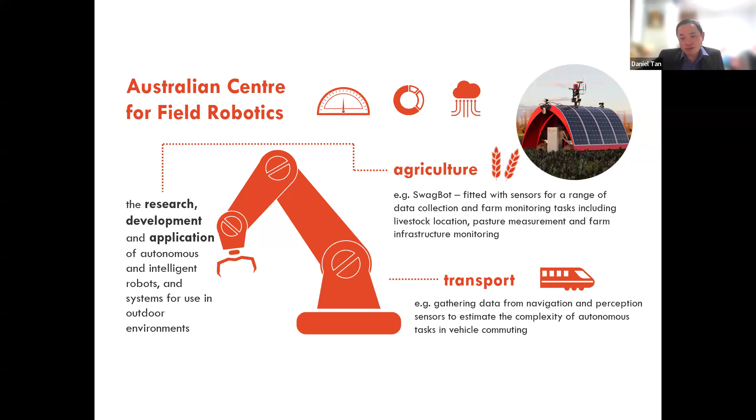So I'll just quickly go through, this is what the research at Sydney University is doing at the moment. A lot of it is still early stages, not commercialized yet.

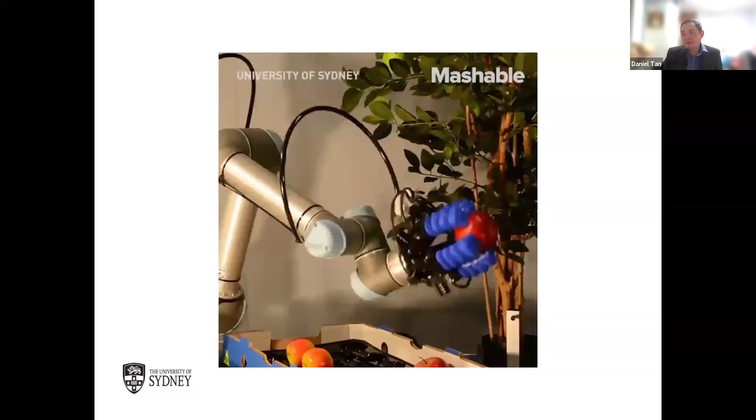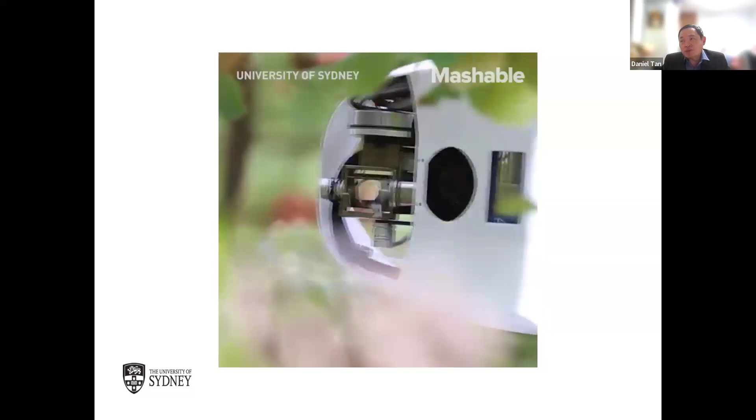So you can see what we're doing experimentally, but the problem is that our farmers are a bit larger than the ones in Cambodia or Myanmar, where farmers have quite small areas. Our farmers have large areas, so they don't want us to develop robots slowly. They want it commercialized, ready to buy and use. They also want, like the tractors we have in Cambodia, four-wheel or two-wheel tractors, to get servicing and spare parts. That's one of the problems: if you buy a robot, it's very nice, but what happens if it breaks down? Who is going to fix it? And what about the data they collect, like all this precision agriculture data? Who owns the data? There's a lot of questions being asked now.

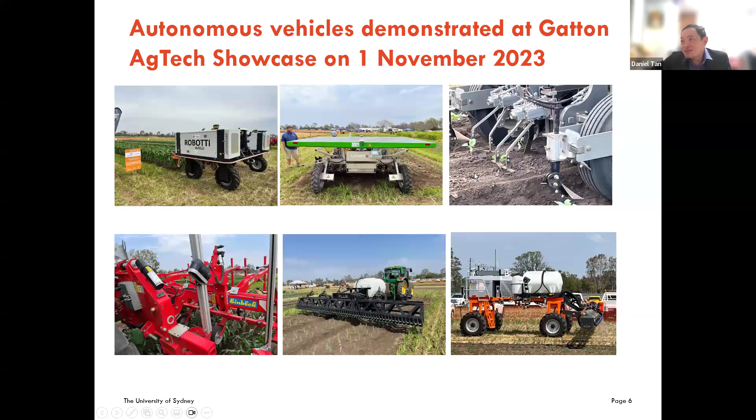So you can see this is the first one. I'll show you some of the machines that they demonstrated. Some work, some don't work so well. Like this one I point to, the second one I saw last year wasn't there anymore, so the farmers didn't like it and didn't buy any. So some machines are more popular than others. I'll show you one by one.

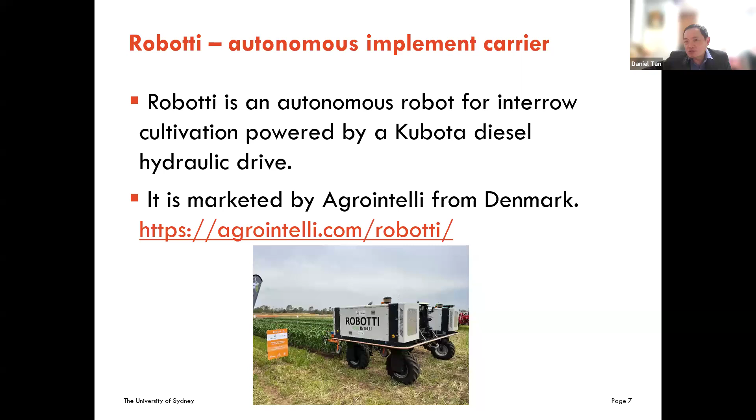This is the first one that was brought in from Denmark. You can see it's called Robotti, a funny name. It's popular because it uses a Kubota engine, a diesel engine, so it's easy to fix because we can just buy a Kubota engine and replace it, easy to get spare parts. It's from Denmark, so that's the disadvantage, we don't always get spare parts, but because it's Kubota, we can get spare parts. You can see it's a very simple machine.

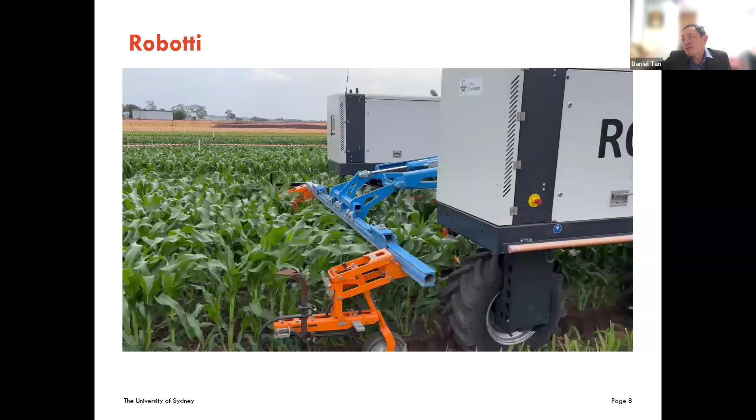It uses RTK, which you don't have in Myanmar yet I think. RTK is real-time kinematics, which means it can drive by itself, accurate within 1 centimeter precision. A lot of our tractors have that anyway, so this isn't really that new. It's just for weed control and cultivation, very simple, and it can turn by itself as well. No driver, runs by itself, and turns by itself.

You can see all our farmers down there taking photos because this is a new machine, it just came into Australia 2 or 3 years ago.

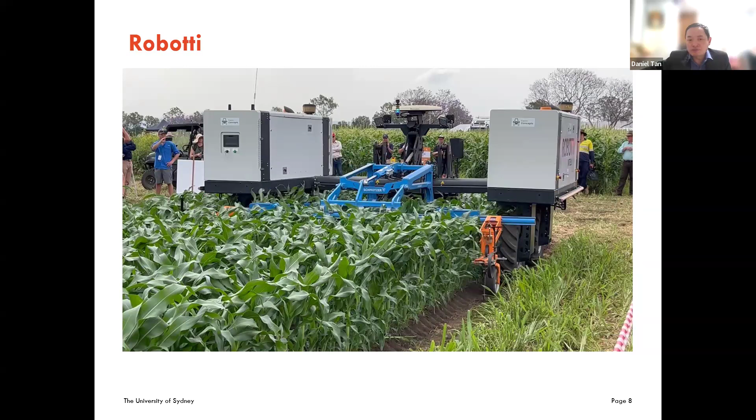Okay, there's another one called the Farm Droid. It's a lot slower because it's battery powered. It's got solar power as well, so you don't need diesel. It's becoming more popular because diesel is expensive, maybe in Myanmar too. So battery might be better, maybe not, because it's slow.

But anyway, some companies in Australia like Qualpak and KalFresh have bought this, and it's a bit slow sometimes when you have lots of weeds. When you have little weeds, it's okay. I'll show you the thing. It's a bit noisy as well, so you can see.

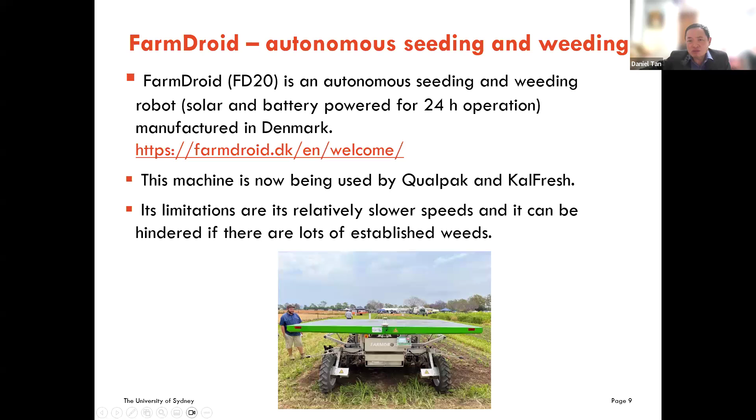So another cultivator, it's got a camera as well, so you can see it goes in between the crops. And you can plant as well. That's planting as well. Planting and weeding.

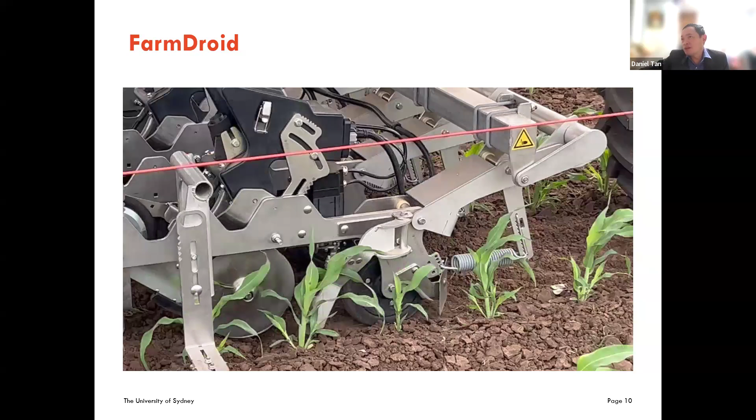No driver. You can see it can turn by itself. No driver, so that's the advantage I guess. But very slow, you can see, very slow. A lot of farmers said, oh too slow, I have a big farm, this will never cover my whole farm. So that's a bit of a problem too.

But it's very popular in Europe, right? A lot of countries in Europe have this little robot now.

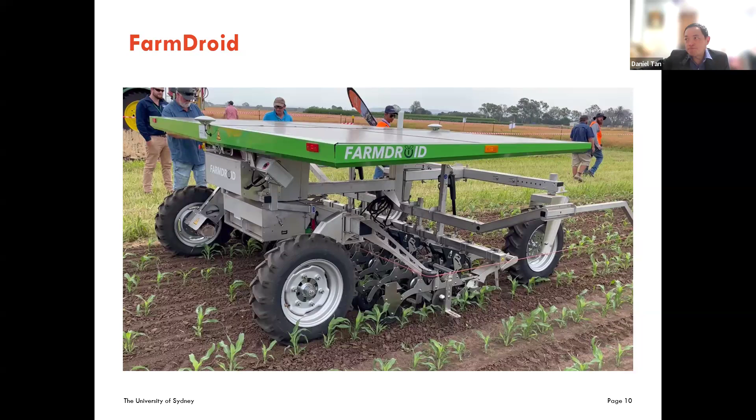Okay, this is another one, it's called Stout. It's built by a farmer in Salinas Valley in California. Case New Holland, which is also a company in Australia, has bought a share and they supply spare parts. It's not totally a robot, you have to drive it. You have to drive a tractor, and it's driven by the PTO of the tractor.

KalFresh has one, I think it's not very popular this year. Last year I didn't see any more. They bought one, and then I think they didn't like it. And other farmers didn't like it either. I'll show you why, you can see.

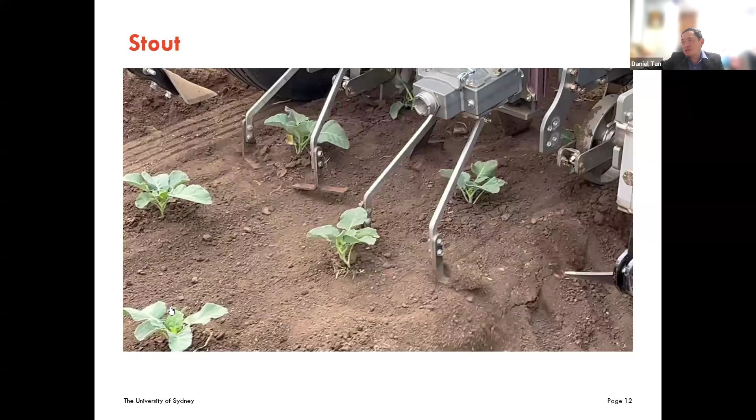So you can see it's not very well calibrated. Sometimes it almost killed this cabbage or broccoli here. Yeah, so I think it was designed by farmers in California, so it's for sandy soil, not so useful for our black soils that we have.

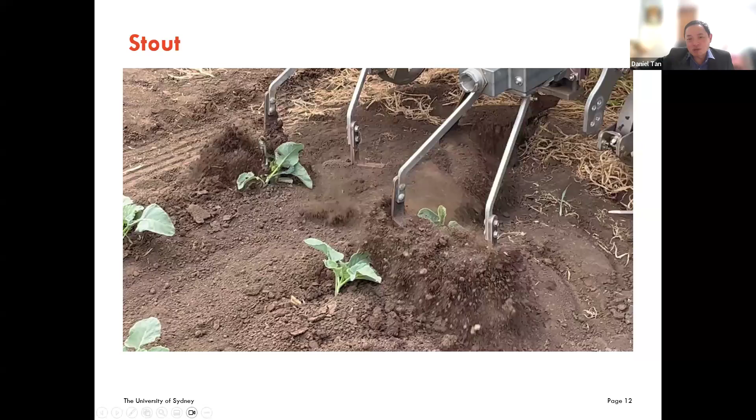In Gatton or in Queensland, I think Professor Miltry knows this place in Gatton. So yeah, it's also killing this one. So not very good, and maybe I shouldn't say this on record, but a lot of farmers didn't really like this machine so much. Okay, I'll show you another one.

This is one from Austria. It's just basically a camera, you can see a camera here, and it helps it go on the right rows, that's all. So you need to drive a tractor, you can see it's not automatic. So this is from Austria.

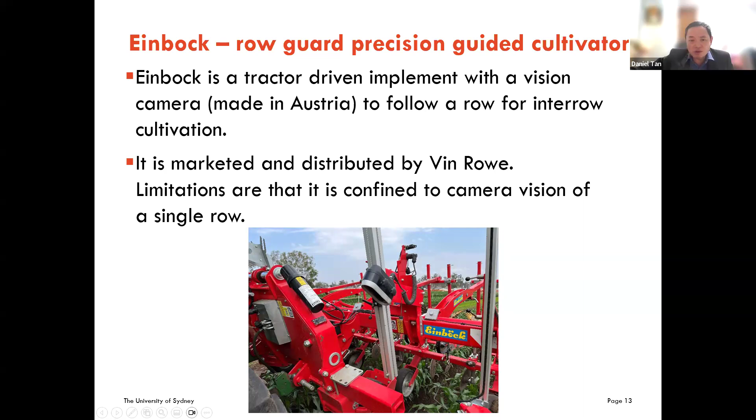You need to drive through, so it's not automatic. But the tractor, all our tractors here have this, right? Like you can see this thing here, this is the RTK, real-time kinematics.

Basically, even if it doesn't drive, this one can drive by itself using this RTK. So if you're not familiar with RTK, what happens is RTK uses the GPS that we use in our cars, but it's more accurate because the farmers have a base station to increase the accuracy of the driving of the tractor.

So this guy doesn't even need to drive. He can use the RTK in the machine, in the tractor itself. I'll show you another one.

Toowoomba is about 40 kilometers west of Gatton, which is about maybe 40, 80, 120 kilometers west of Brisbane. So anyway, with being moved to a bigger town, it's got more labor supply now, so they can build more. It's still quite expensive.

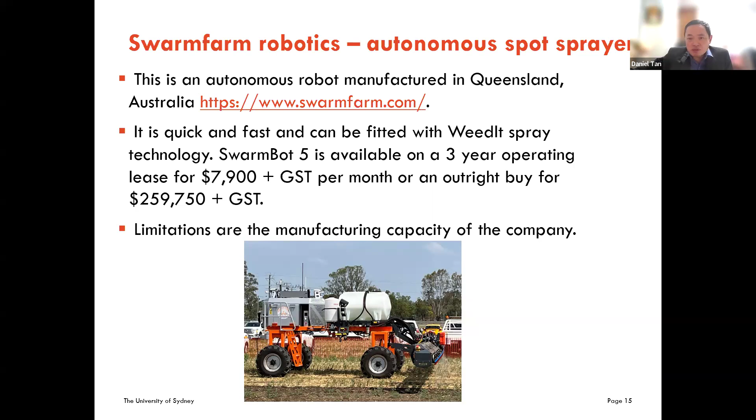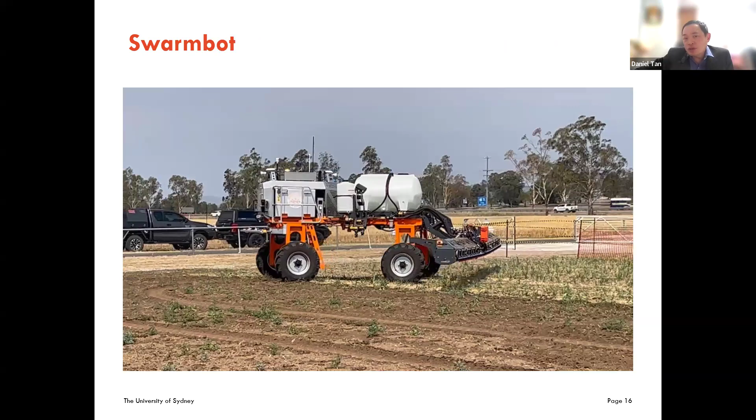I'll show you, these are all my own videos so it's not very good, I was using my own iPhone to video all this. So you can see it can turn by itself. It's got RTK on top, it can drive by itself, and it sprays by itself as well.

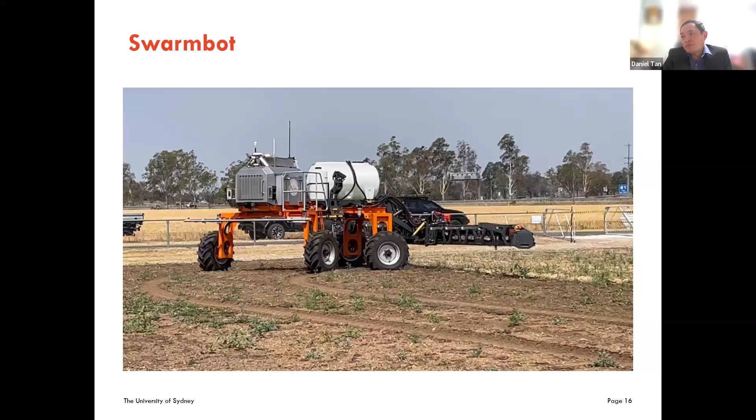No driver, as you can see. It's driven by diesel, it's a diesel engine.

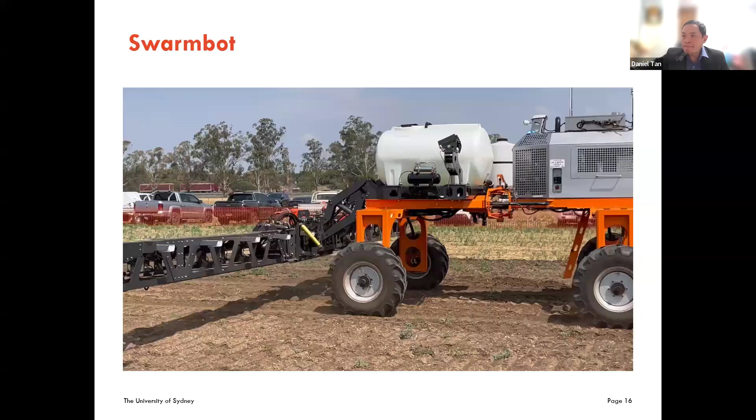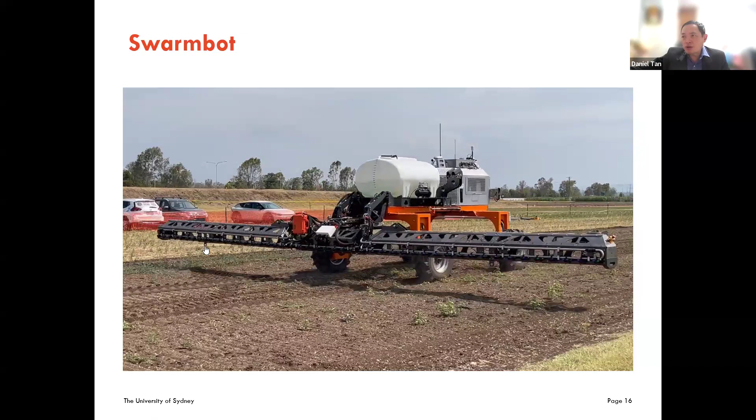So it's mainly used for spraying. You can see what it does. There are two types of spraying, right?

There's the old spraying method, which they call green on brown. This is green on brown, where brown means it's on fallow, like our rice fallows in Myanmar or Cambodia. We have a lot of rice, and then a short or long fallow between rice or mung bean or something else.

Or galapi, the chickpea. We have rotations, and between the rotations they maintain and kill the weeds. So you don't spray the whole field. If you spray everything, you use a lot of herbicide, but this uses a sensor, so it only sprays where the weeds are, not the whole field.

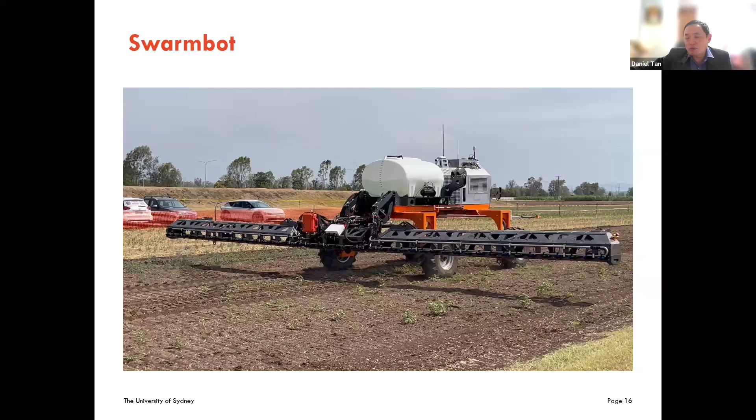Okay, I'll show you the technology now. This was actually developed in Australia. It used to be called a WeedSeeker. Now Americans have also used this and developed it further into the WeedIt technology, green on brown. So I'll show you green on brown technology. It's very simple technology, nothing high tech about it.

And let's see whether I can play it.

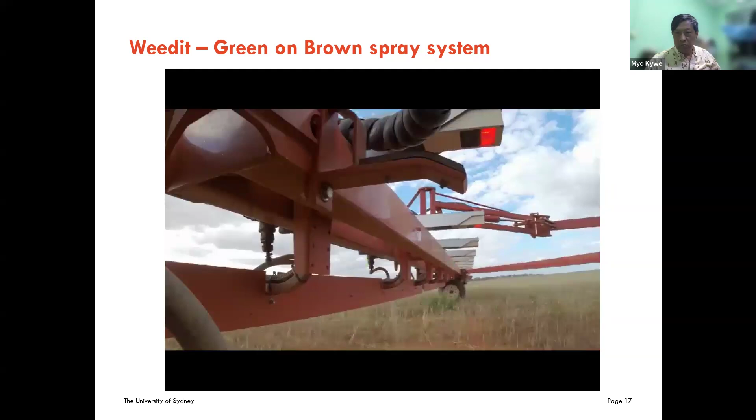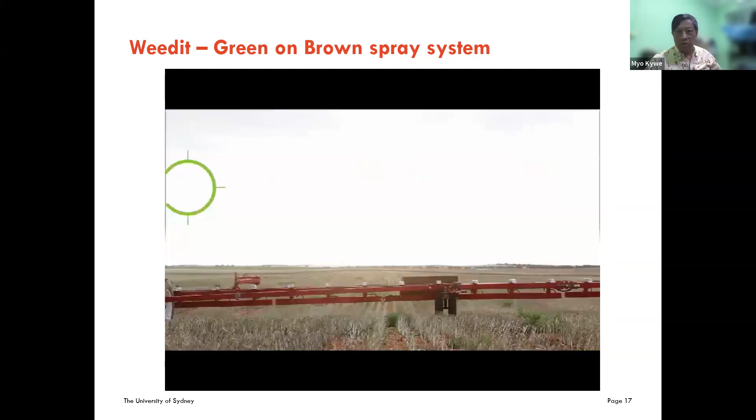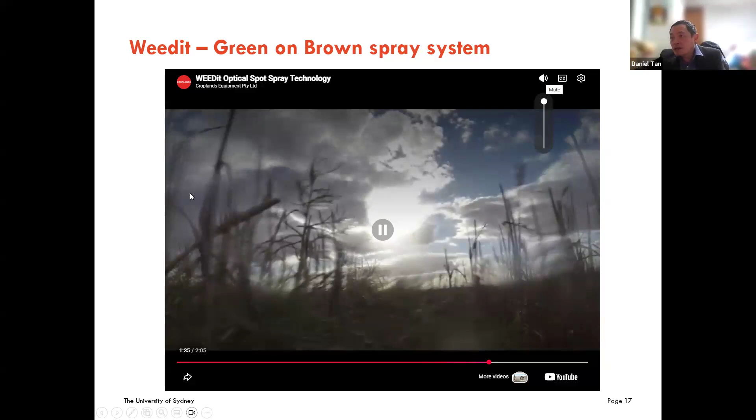There is no voice, no sound, Daniel, is it right? Without the sound. We didn't hear the sound, is it right? Without sound, Daniel. Don't hear the sound. So it's fine. Okay, let me stop this. You can't hear the sound at all? No sound? Never mind, I just explained to you how it works, right? But you understand the technology? Okay, I'll stop it. So what happens is it's got this - I think the most expensive part of the technology is the... Can you hear me? Yes, yes, yes. We hear your voice now.

The most expensive part of the technology is the sensors. What the sensor does is very simple - it just detects where the weeds are. Anything green, it will spray, so it just sprays the weeds in a fallow. Nothing high tech, no AI, nothing. Just simple: anything green, it sprays. So that's green on brown technology.

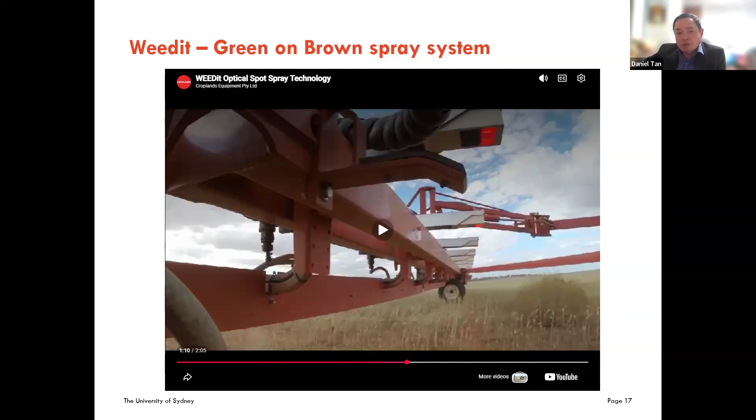Okay, I'll skip this one because it's not working well. But this is very popular now in Australia, America and Europe as well, because it's very simple, no need for AI, no need for anything. It's used for controlling weeds and it's very simple technology, so very popular. I think maybe 70-80% of farmers are adopting it because they can actually reduce their use of chemicals a lot. That's why it's so popular. I'll skip this one since you can't hear it.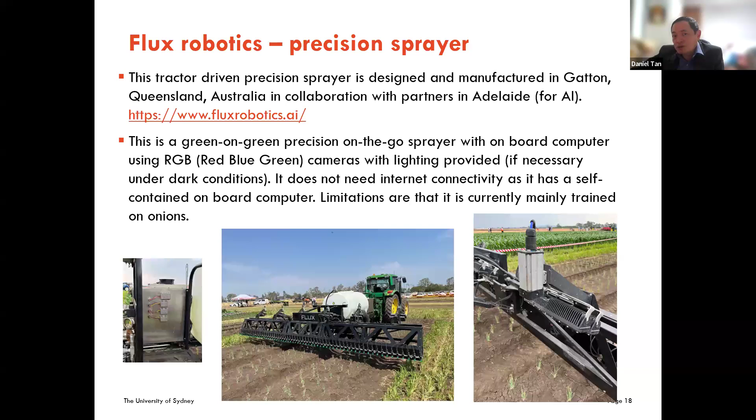But this is the old version with someone driving it. I'll show you a newer version later - they've been developing so fast, they have a new version. I'll talk about the Flux later, but they have a new version of it.

Okay, so that was 3 years ago, and last year they brought in more machines. Even the old developers in Australia have upgraded their old machines to new ones as well. So I'll show you the latest ones from the October showcase, just last year.

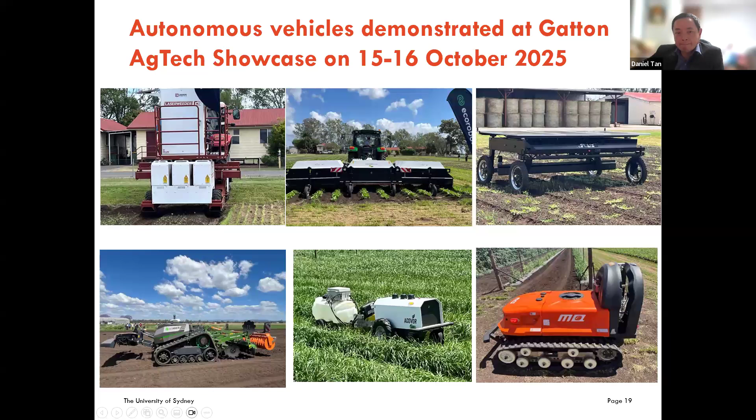Okay, this one is a funny one - it's a laser weeder. It's very expensive, and I thought farmers wouldn't buy it, but it was very funny. There's a story behind this.

I'm part of Hort Innovation, the group that funds all these machines coming into the country and tries them out. I'm on their strategic investment advisory panel, the board that decides which machines we invest in. This one was interesting because we wanted to borrow one and put it on a ship to go to Australia. It was funny because one farmer flew to America not knowing we had one coming by ship, so he ordered one himself. He went to see it in America, got interested, and ordered one.

And then they gave him the one that was on the ship on the way to Australia. So that's the story behind it.

But anyway, this is a funny one. It's expensive, but I know the Chinese are also building a similar one, and maybe they're selling it for half the price or even cheaper. So maybe in future we can buy the Chinese one, cheaper.

It's also green on green technology, meaning it can use AI to identify which is a weed and which is a crop, and it uses a laser to kill the weeds. The lasers are also second generation now - the first generation could only last 1500 hours, but the new diode lasers can last 15,000 hours, so much longer duration.

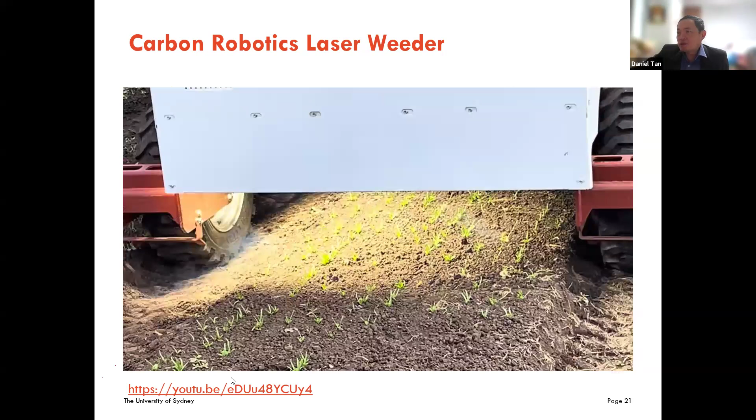So you can see, maybe not so simple, but it's like Star Wars - have you watched Star Wars, the movie or the whole series? What it does is it has a camera and can identify which is the crop and which is the weed, and it only kills the weeds, not the crop. We are testing now to see how accurate it is, but that's the gist of that technology.

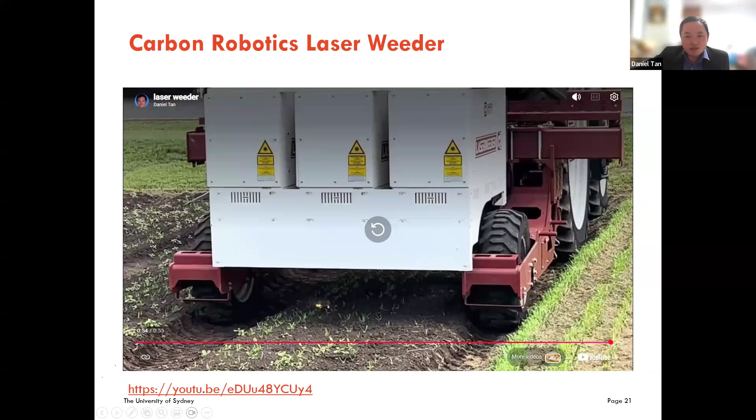There's a few others - the Swiss or the Europeans have one called Ecorobotix. So we brought one in to test it out. It's quite expensive too, 500,000 as well, and they have distributors now in Queensland and New South Wales. I'll show you how it works.

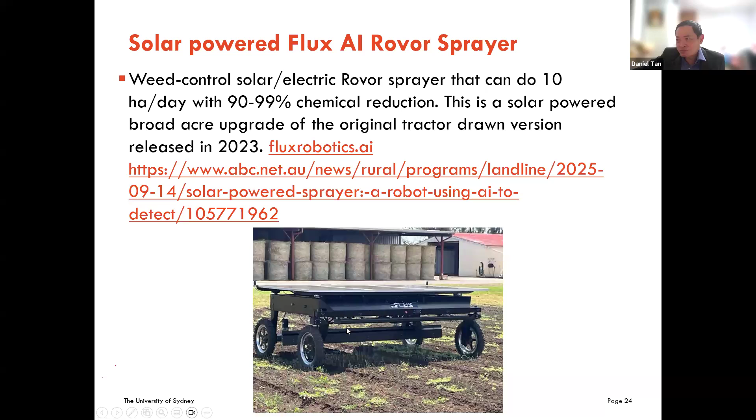So this becomes like a robot - you don't have to drive a tractor. It's the same company, but they've developed green on green technology, so this is a second generation - no more tractor drawn, it's all like a little robot. It's very similar to the early Danish ones that were brought into Australia. I don't know whether they copied them or something, but it's very similar to me anyway.

So this is the Flux Rover, which is Australian. You can see it doesn't spray everything - it sprays only the weeds within the crops, using AI to identify which are the weeds and which are the crops.

What happens is you can't spray something like glyphosate or paraquat because you'll kill everything since it's so close. Instead, it sprays a selective herbicide, for example 2,4-D or something similar, that doesn't kill the onions but will kill the broadleaf and other weeds. It's selective, and since it doesn't spray the whole field, you don't waste the chemical - you only focus on the weeds.

I'll show you - you can see it doesn't spray the onions much, it only sprays mainly the other weeds. You can see it's spraying not the whole field, just mainly where the weeds are more - the onions get sprayed less because it uses AI to work out which is the weed and which is the crop.

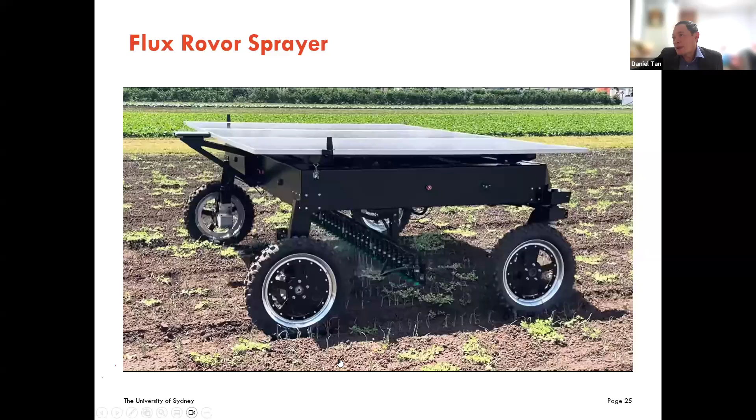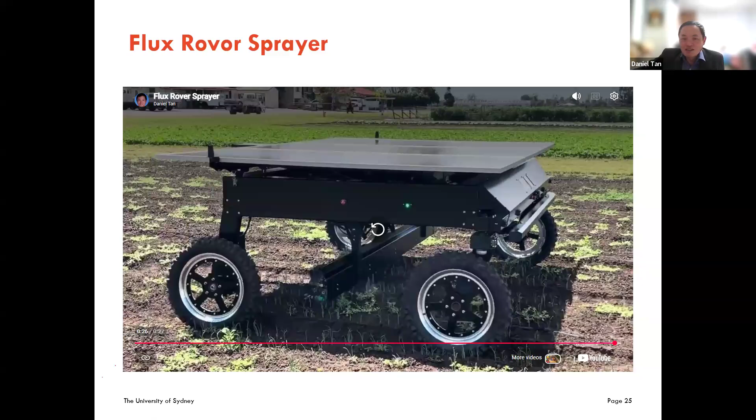Okay, so this is the rover. They're quite new - I think they've only built two or three. So the problem with a lot of these technologies in Australia is that they only build two or three, but farmers want a lot of these machines now and don't want to wait for two or three machines. So that's the problem.

There's a few others, it's really expensive. We probably don't want to hear about this, but I'll show you quickly.

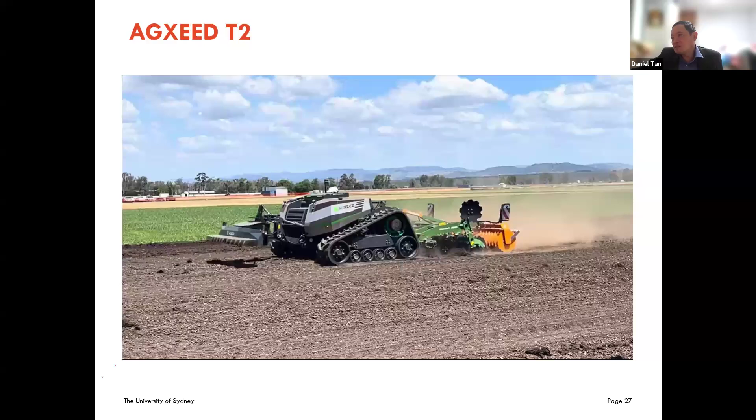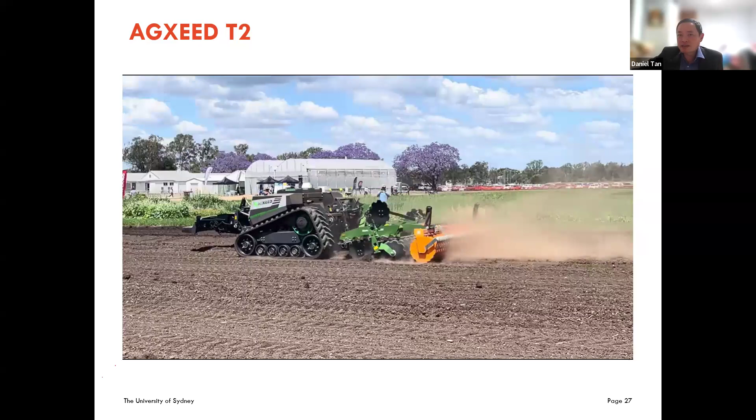This is a New Zealand one. I don't know why they built this - looks very much like our own Australian robot, but looks like a tank actually. I don't know whether it's popular or not. So far I don't think anyone has bought it. But anyway, these are some of the German ones. I'm not sure how popular they are - they look like the other machines. They look all the same now. After you see one, you see them all.

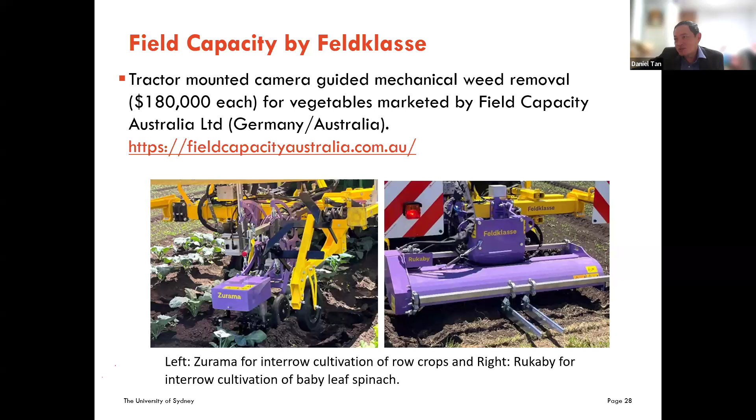This is a German one, but I'll just quickly show you what it does - look at the start. I'll quickly go because it's pretty boring now, looks all the same. And then we have a few of the Kiwi ones, the New Zealanders.

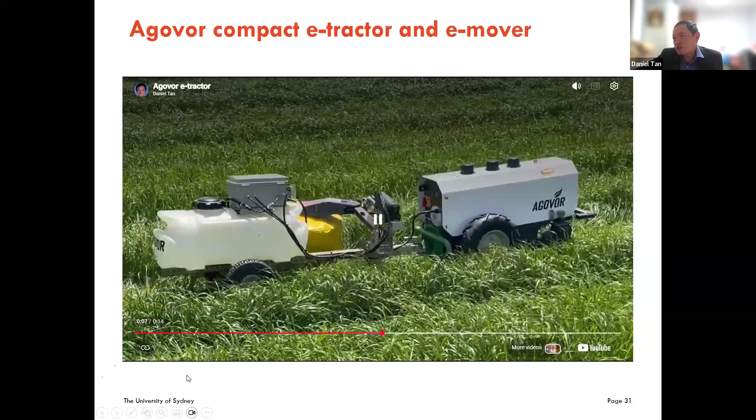They have built very small ones. I don't know, maybe in New Zealand they have very small orchards or something, and a little bit cheaper I suppose. These are like automatic little two-wheel or four-wheel tractors, small ones. I don't know whether it's really small - that's spraying, maybe pastures or something. Tiny machines. Maybe good for smallholders, I'm not sure.

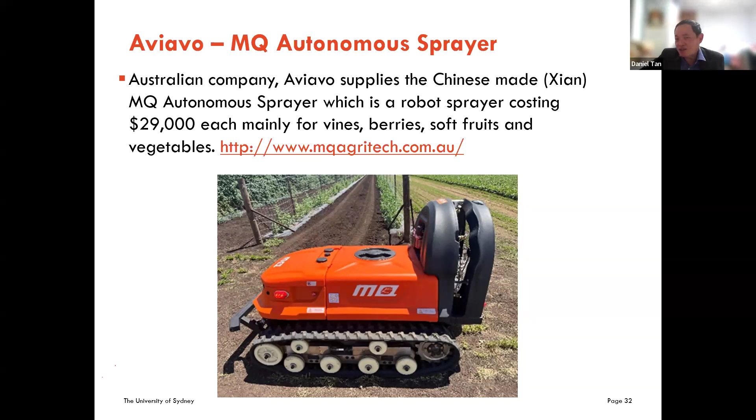The Chinese have produced a lot of this type, yeah, and even they are in Cambodia also. I asked my colleagues in Cambodia and they said, 'Oh, we have this,' and the Chinese have brought them in. And also the Czech Republic, they've built something similar as well - a bit cheaper. You can see they're used for spraying, but they spray everything, no AI, nothing, just spray everything, right? So you can see like this.

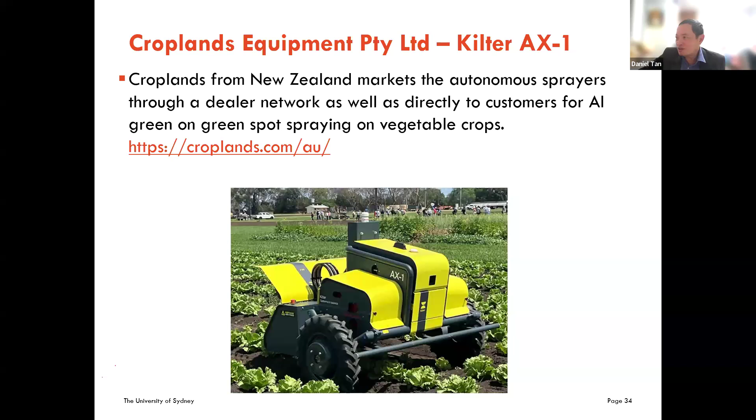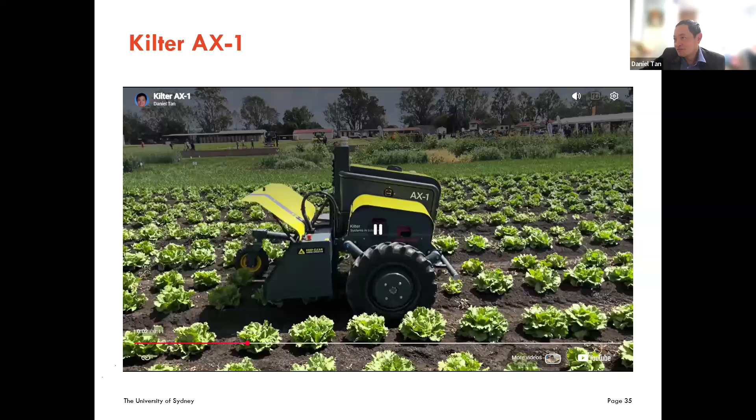So it's all my video, not very good quality sorry, but hopefully it comes out. I had too many little videos so I had to put them together. Okay, New Zealanders, they build a lot of these little ones. I don't know whether anybody bought this, but in New Zealand the small tractors are very popular - two-wheel tractors I think. Oh, it's a three-wheel, okay.

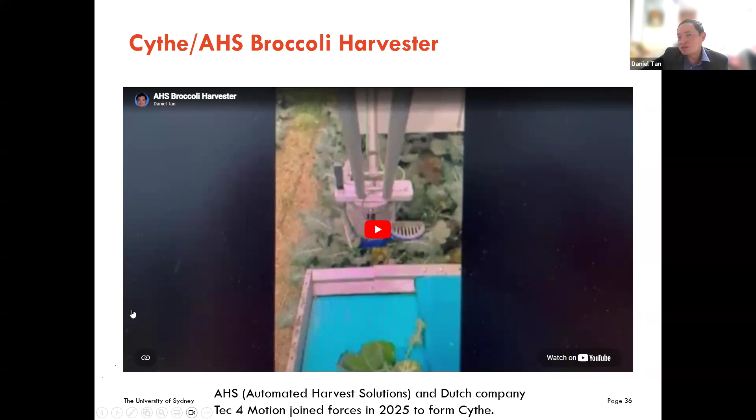This is not my video, I didn't take this video, I just videoed their video because I've never seen this machine. There's only three machines built, so maybe later next year we might bring one to Australia to test it out. But the problem is growers will not buy a machine unless they know it works on their farm, so we need to bring one machine over to test it. So that's what's happening, I'll show you this thing.

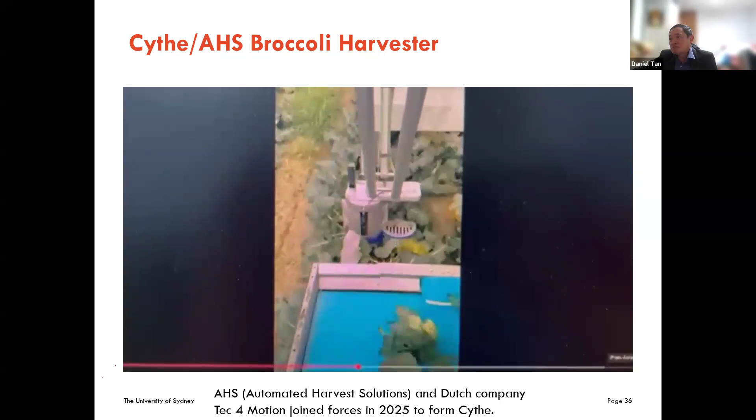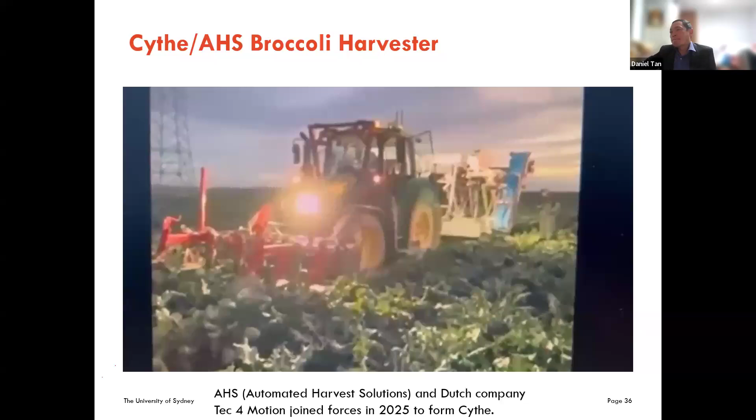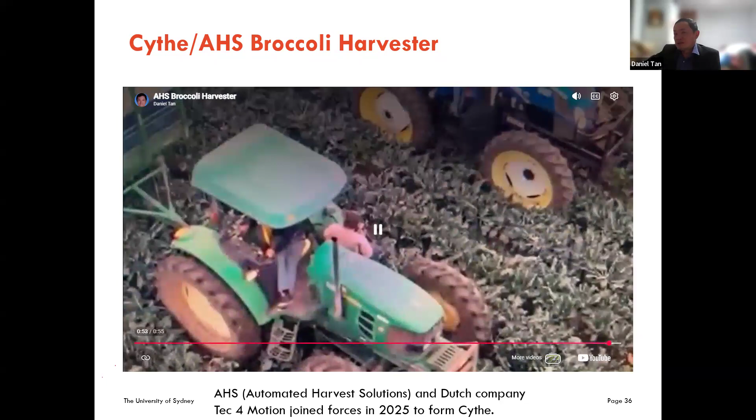Oh, here - so this is California. It uses AI, basically you can work out what size they are and it harvests them, picks them. This one is the European one - they can do 24 hours because they have lighting. Okay, so that's the Cythe.

This is a Canadian one. It's funny, Canada also developing their own. This one is a bit expensive I think, but you can have a look. I don't know whether it works - I'll show you, I'll talk over it though.

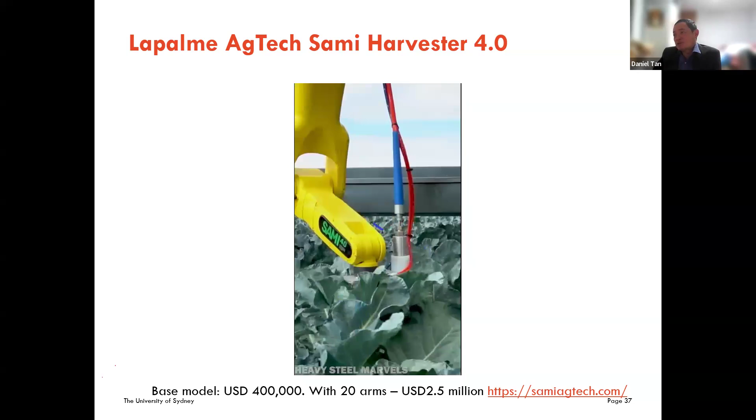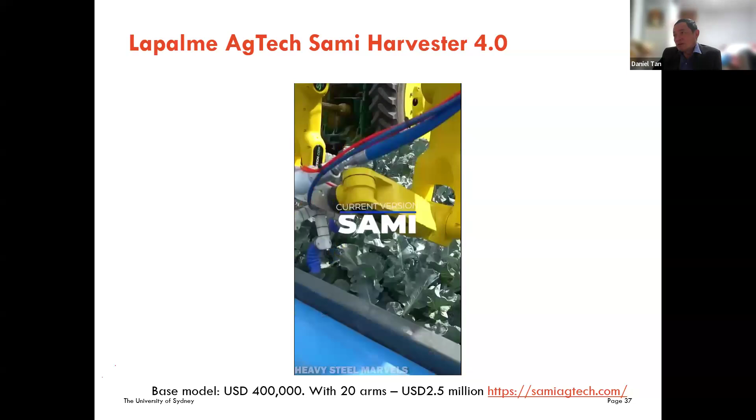This Canadian one is called Sami. You can do also cauliflower and asparagus. Uses AI as well, as you can see, so it only picks the ones the right size.

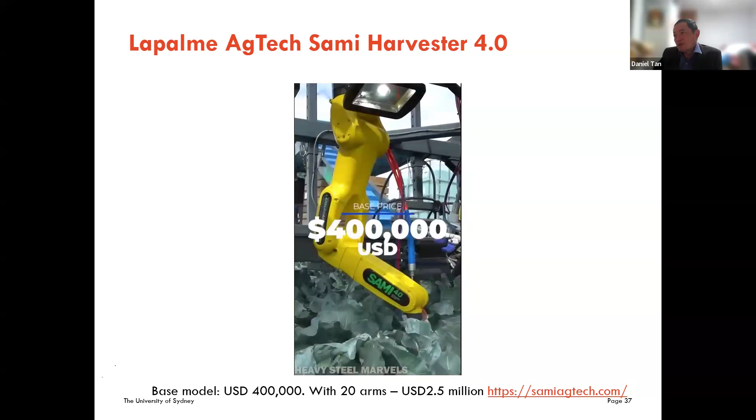Four hundred thousand - so you can see it's very expensive, even for Australians. I'm not sure - actually now our farmers are debating whether we should buy one Cythe/AHS, or should we buy the Canadian one. Which one should we try first, because no farmer is gonna buy something if nobody wants to be the first one. Because sometimes the problem is we buy a machine, sometimes they don't work properly, we wasted the money, right? So it's not so good.

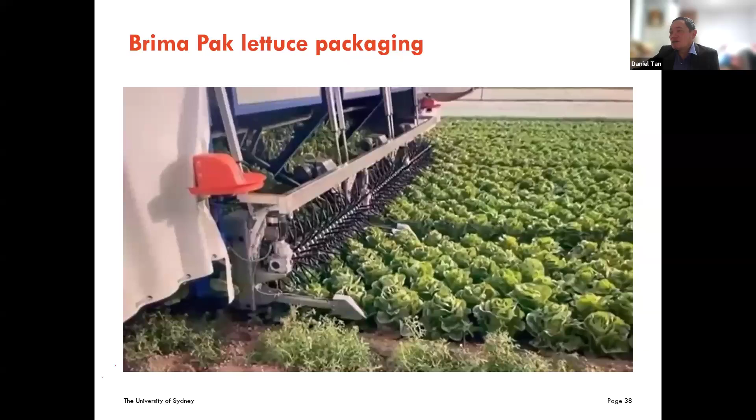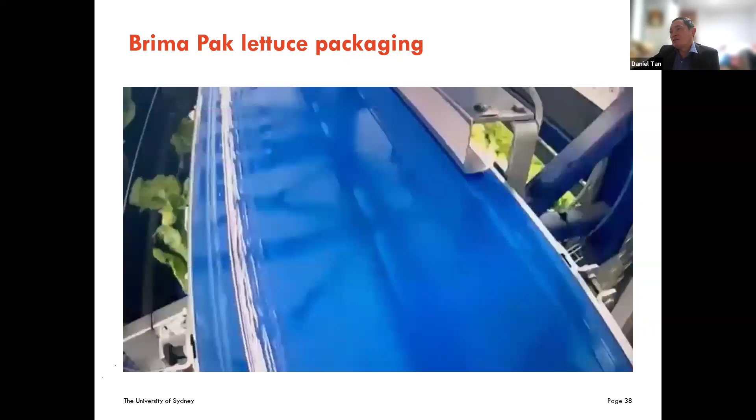But this is another one, an interesting one - it's more like a processing one, so I'll show you quickly. They lift them up, and then it's packed in the field, right? So they basically pack it. This is all done on the harvester - people are doing this on the harvester.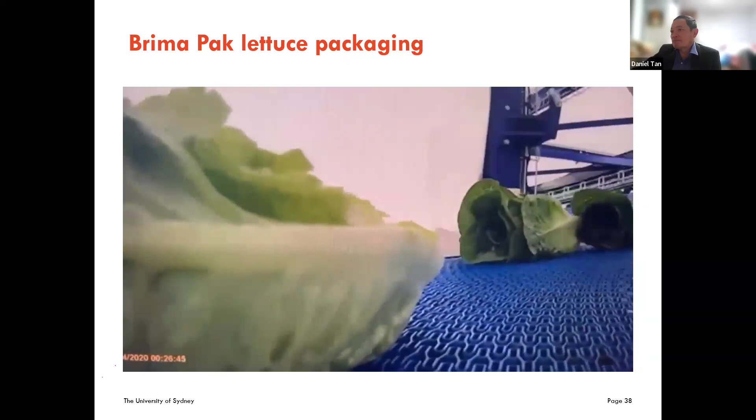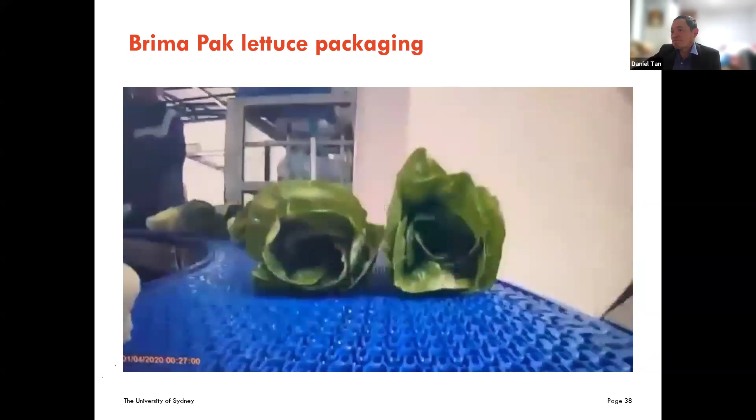And then they pack it, basically. So there's still humans checking it, it's not all automatic. And then they wrap it. Yeah, this is mostly European - it's like a harvester, but with semi-human packing on the harvester. The problem is it's quite heavy, which may not be good for Australia. Sometimes it rains and you've got a heavy harvester at the back - you might get bogged, get stuck in the mud. So there's some problems there, we're not sure. Maybe we won't get this in Australia.

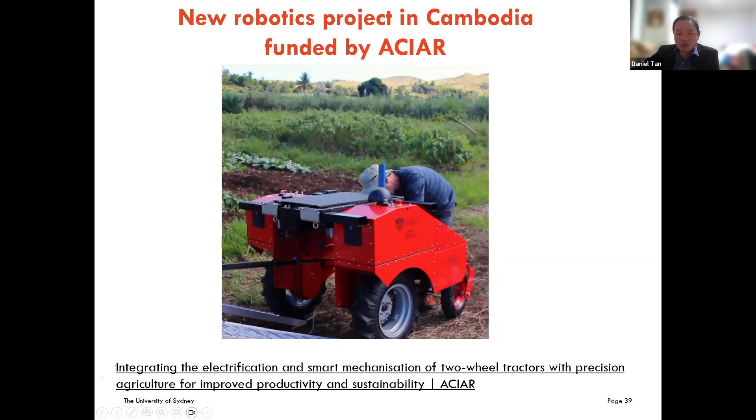Okay, so I'll go through some of the new projects we have in developing countries like Cambodia. This is one of the first robotic ones, our little tractor called the Farm Digital Farmhand, which we brought over there with our new project. I'll show you quickly what we're doing - instead of making a new tractor, which isn't very useful for Cambodia, what we're trying to do now is work with the Cambodians to look at existing two-wheel tractors they have, and perhaps convert them - maybe a diesel or petrol engine - into a robot. Like a two-wheel tractor robot.

So one of the key things is that we replace it - working with the Cambodians, like RUA, the Royal University of Agriculture - we replace the combustion engine with an electric motor, the clutch with direct coupling, the fuel tank with a lithium battery, and the throttle with an electric throttle lever. The air filter we don't need anymore, we remove it. The exhaust we don't need anymore because the diesel is taken away. So basically, replacing the engine with the battery, it becomes a little robot for the Cambodians to play with.

So now with it as a robot - the girls, women don't like the two-wheel tractor because it shakes too much, too much vibration, too noisy and hard to maneuver. But they're happy to use this electric one because you can just press buttons. Sometimes it's also programmed, like I mentioned, for green-on-brown spraying or green-on-green - you can use high-tech precision agriculture applications.

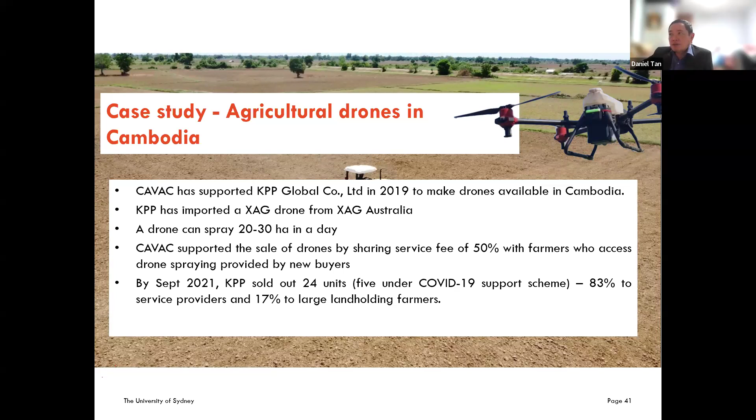So our project, which I lead, CamSID, we carried out demonstrations in 6 villages using machine planting with a drone. The machine planting is by a little tractor from Thailand actually, and then we use the drone to apply the pre-emergent herbicide.

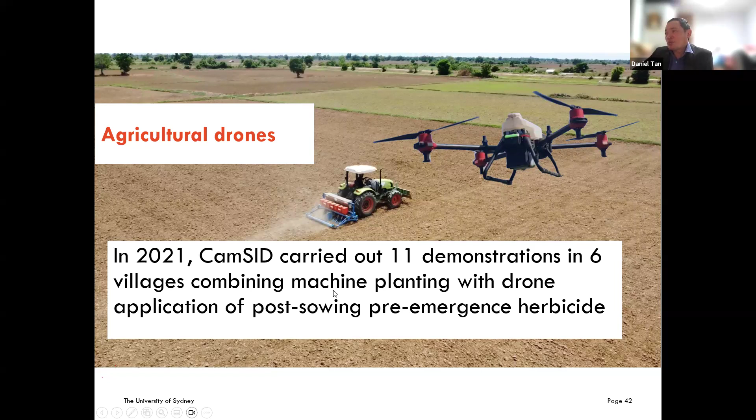So we also did a survey of the drone service providers. The typical provider has 80 farmer clients and services 350 hectares.

Drones are quite useful in Cambodia, but not very useful in Australia, because in Australia we have big areas - our rice fields are 400 hectares, we can't spray with a drone, we have to use big helicopters or planes. In Cambodia, the rice fields are very small, like 1 or 2 hectares, so we can use a drone - maybe a small drone with only 25 liters capacity, and we can spray a whole hectare very quickly. So the service fee is very small, only $10 per hectare. It's quite competitive, and it's quicker also than spraying by hand or by boom spray or something.

They mentioned disadvantages, because they have to repair and replace parts of the drone, but most service providers say they can recover the purchase cost within 1 or 2 years.

At that time, they predicted the adoption rate would be between 15 to 90%. Now the recent survey from last year showed that the adoption around Battambang and a lot of areas in Cambodia is now about 60%.

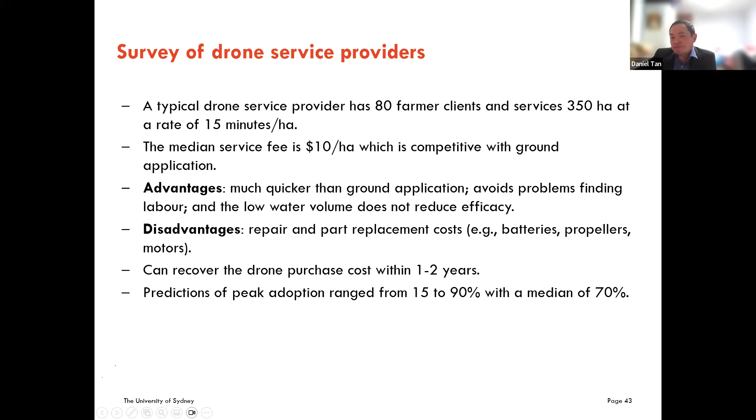We asked them, what benefits do you have to purchase a drone to apply? They say, we can save time because it's faster, it's higher profit, less risk to health. You don't have to spray, you don't have to wear masks. Cambodia and Myanmar are very hot, nobody wants to wear a mask or protection. So they use a drone, and it's safer and faster. That's what they say.

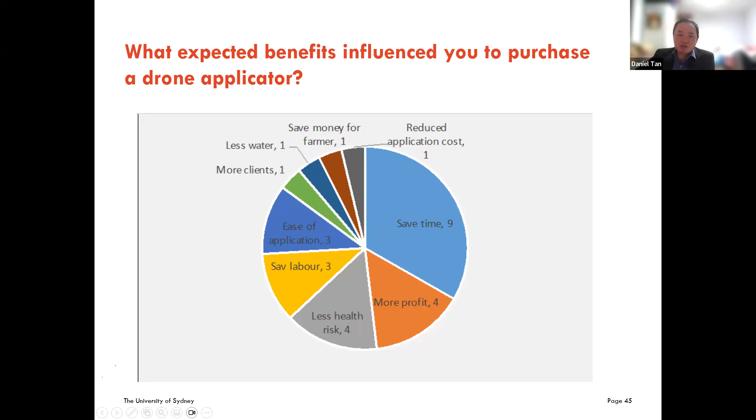But it's not always good. Of course, there are also a lot of needs and problems. Some don't know how to identify weeds. They don't know IPM, they just spray. The more they spray, the more money they get. They don't even think of IPM, or integrated pest management.

So they want us to help them develop farmers field schools and Telegram groups. I don't know whether you have Telegram in Myanmar, but Telegram in Cambodia is very popular, Telegram and Facebook. So I'll quickly go through this.

People think, like my donors who give me money, they think, oh why don't you train the government extension officers? But when we ask the farmers, who do you get your information from, they don't say I get it from the government extension officer. They say I get it from the people I buy all these chemicals from.

Or they get it from the cooperative, like you guys, the leaders of the cooperative. So what we did was a social network analysis to ask people, where do you get your information from? Who do you ask?

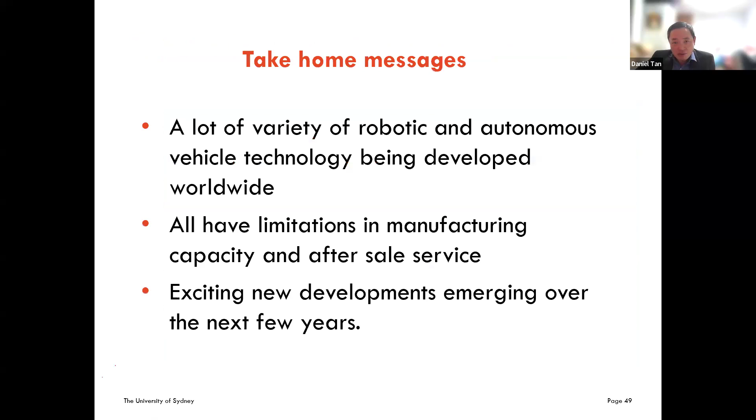So that's close to the end. Oh wow, there's someone drawing there. That's good, okay, so that's the demonstration. I think my time is up, so I'll quickly let you answer, I'm happy to answer any questions. I'll stop sharing so you can see.

Thank you so much, Daniel. So, yeah, very informative.